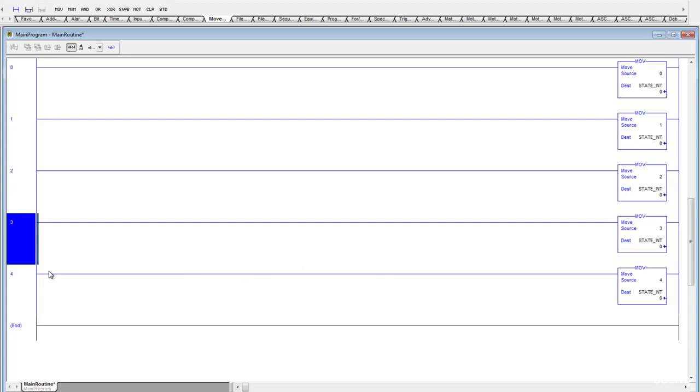But I'm going to go ahead and create one more of these actually because I want an intermediary step whenever I first enable the system. Before I've determined exactly what my level is, it's going to be kind of in a standby mode. So let's just go ahead and create one more place for that. So now, how am I going to get into these different modes? Well, to get into my 0 mode, which is off, I want to have to hit a stop button.

So I'm going to come back over here to my bit tab, and I'm going to create an XIC, and that's going to be associated with a tag called stop_btn. And as soon as I create that, I can right click, create a new stop button. You see my data type is a BOOL. That's exactly what I want, because this is a digital signal. It's either on or off, 0 or 1. We know that by now. And I'm going to leave my scope as the main program and create that.

Then I'm also going to want a one-shot in here, because whenever I push that button, while I'm holding that button down, I don't want it to be moving a 0 over and over again 1,000 times for all these different scans. So anytime I'm using a push button, I'm also going to throw in a one-shot, because that's going to convert a momentary signal, which could last for 100 scans, into a single pulse, and it's only going to happen for one scan while my PLC is running, and that's what I want.

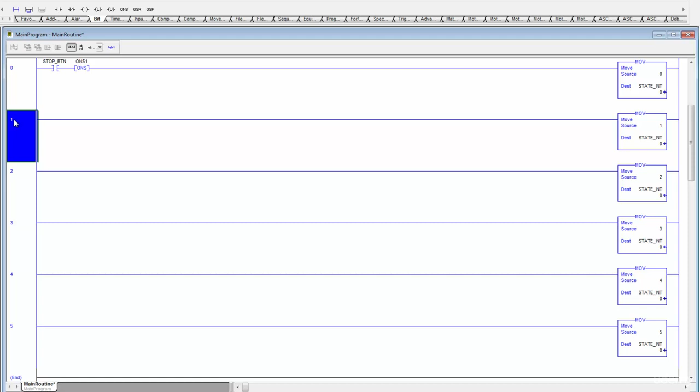Well, to get myself into mode 1 is going to be my intermediary mode. That means we just came online, but we haven't yet determined what the level in the tank is. That's going to be triggered by my start button. So same thing, start_btn. We'll right click that, create a new bool in our main program, and then create another one shot, this time ONS2. And we'll go ahead and create a new one of those also. So now we've got a way to turn our system on and turn our system off.

Now let's start thinking about how we're going to determine our level. So this rung 2, that's going to put us into fill mode. So how do we determine whether we need to fill our tank or not? Well, we know we're going to be looking at the low level switch, but we don't want that to be instantaneous, because sometimes water inside of a tank can be turbulent, it's sloshing around, and when you have a digital level switch, that switch can be rocking back and forth, open, closed, and we don't want that to determine our mode.

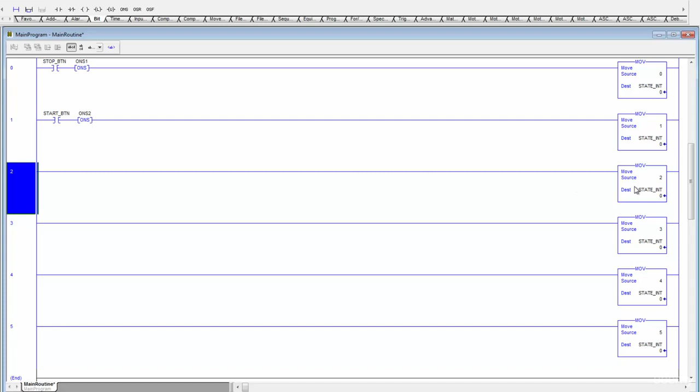We want to make sure it stays that way for at least a good 5 seconds before we actually take any action. So let's come down here and create some logic. We need a 5-second delay on that, and let's create that down here on a new rung. So the first thing we want to do is look to see if our low-level switch is open. So we're going to use an XIO for that, examine if open. And we're going to look at L_SW, and that will be our low switch.

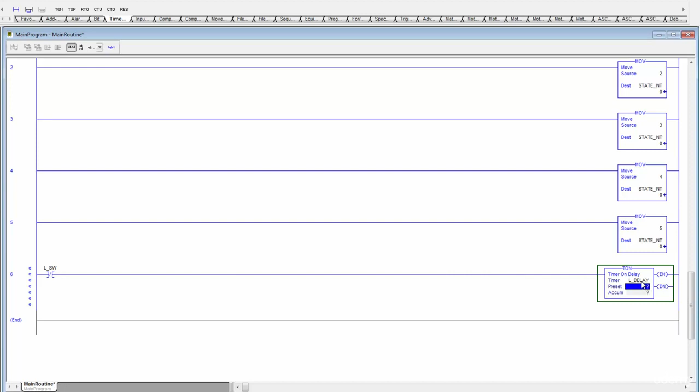And we're going to associate that directly with a timer. So let's come over here to our timer tab and take a TON, and I will call this L_delay. And before we can set the preset, if we try right now, it won't let us because this timer is undefined. So we need to create a new L_delay, and it automatically knows that that's supposed to be a timer data type. It's going to put that in the main program because that's what we've been using for scope all along. So now we can come down here to preset, and the presets in Logix 5000 are always milliseconds. So I'm going to put 5,000 milliseconds in there, and that's going to be a 5-second delay timer. So now, once this switch opens, this timer is going to start counting.

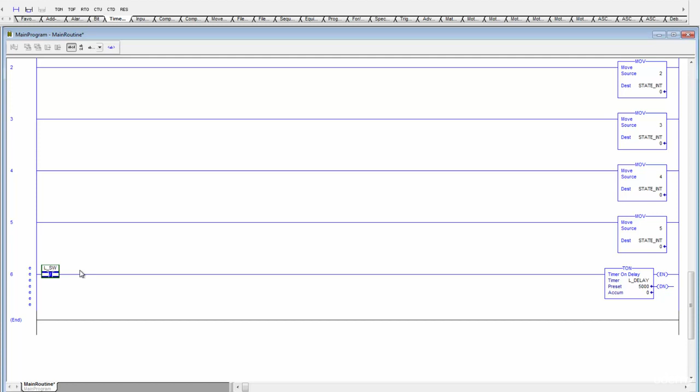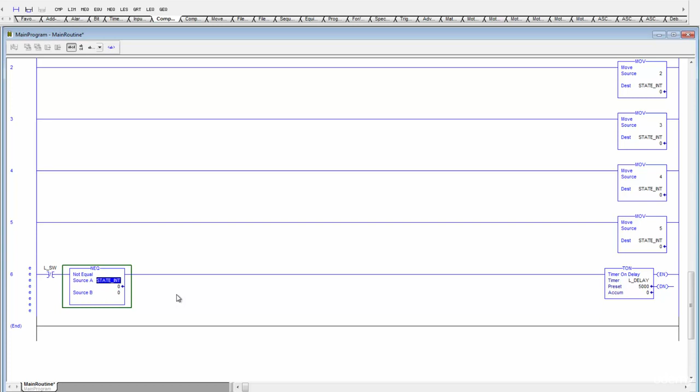But I don't want that timer to start counting if we're not actually in the right mode. If we're in an alarm state, I don't want this to even move because I don't want there to be any possibility that we're going to go into a fill mode because it thinks our tank is low. So I want this thing to only work if we're in certain modes. So I'm going to come up here to my compare menu, and I'm going to select an NEQ, which is not equal to. I want to reference my state. If it's in mode 0, that means our system's off. Well, I obviously don't want to try to fill the tank if the system's off.

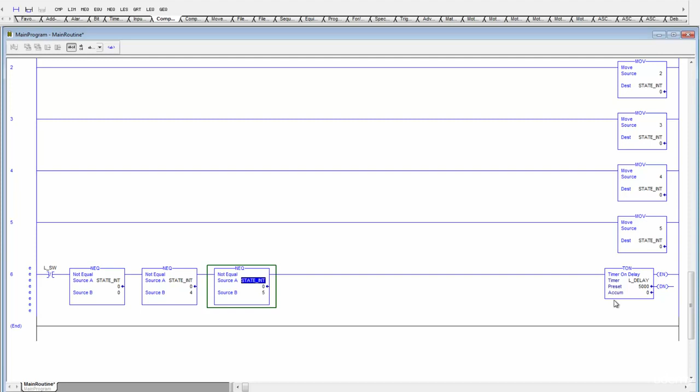So what else do I want to look at? I'm going to copy this and make 2 more. And I know right now that if I'm in state 4 or state 5, I'm in an alarm condition. And I don't want to go into fill mode if I'm in an alarm condition. So I want this to not be equal to 4 or not be equal to 5. So as long as we're not in a state 0, 4, or 5, let's go ahead and energize this timer. And once this timer starts, eventually that's going to time out. And when that times out, then and only then do I want us to go into our fill mode.

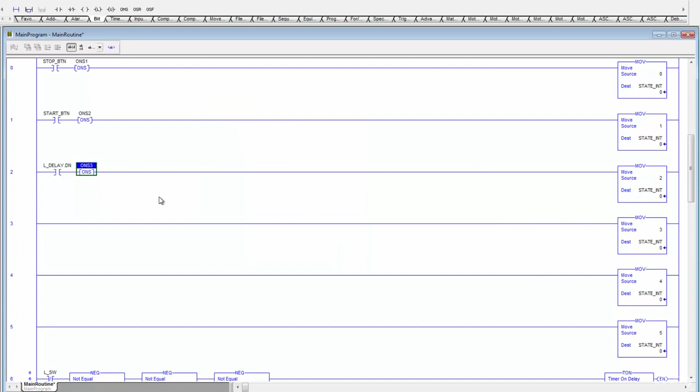So I'll come up here and I'm going to put one more XIC. So let's go back to the bit tab, put in our XIC, and that's going to be L_delay.DN. So when that timer is done, then we're going to one-shot one more time. So I'll give ourselves an ONS3, and then let's go ahead and create the data tag for that. So now we have a way to get into our fill mode as well.

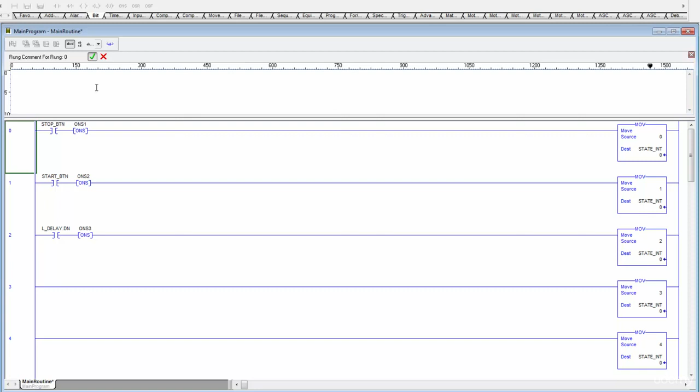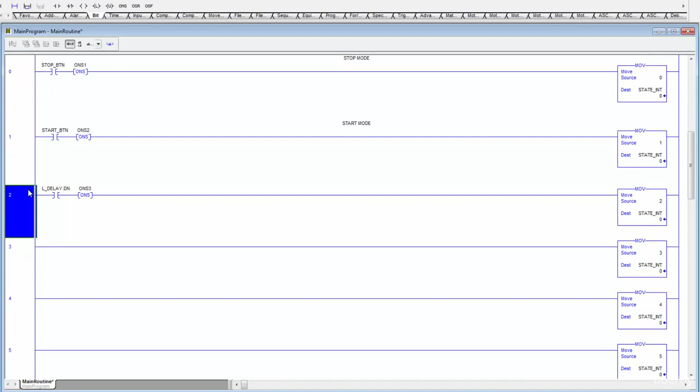And one other thing I can do, I'm going to come up here, right click on this, and edit the rung comment. So by doing this, I can create a comment up here which is going to tell us what this rung is doing. And this is going to be stop mode. That's good enough. And I can do the same thing for rung 1. So I'll edit one more rung comment here. That's going to be start mode. That's going to be our intermediary mode, if you recall. And then down here I've also got a fill mode. So I'll just type that out. And now we've actually got a little bit of a guide step by step in here that tells us what's happening on these rungs.